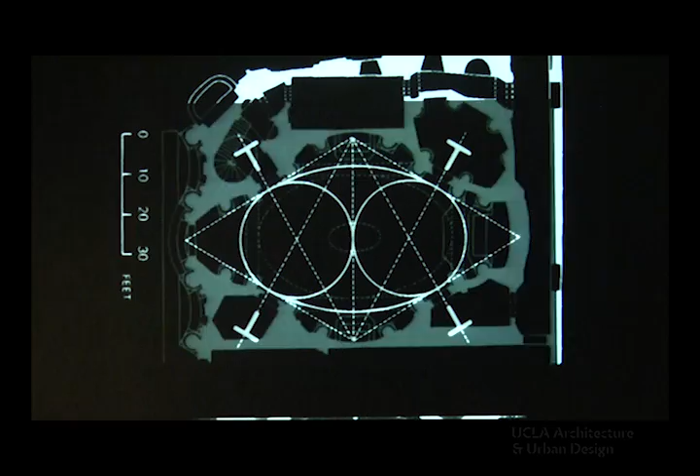The fascination for Baroque elements is also based on the rigorosity with which these architects actually tackled opulent architectural spaces by the use of geometric conditions. So, in a way, it teaches us how we can use geometry and maybe some mathematical ideas in terms of generating opulence and articulation, protrusions and extensions, in order to incorporate them into a contemporary architectural environment.

One of the very first lineages of exploration that Sandra and I did are basically considering topological ideas of architectural bodies. For us, there were actually two specific elements that we wanted to explore with these animations: on one side, openings in complex curve geometries, and on the other side, possibilities for circulation.

It is not about a specific architectural project. These are basically only prototypes and possibilities that we later on started to include in architectural projects. It is very important for us to continue these sorts of explorations that start with something that can be considered abstract, an abstract machine for a variety of ideas, and continue with them in possible architectural projects.

These, by the way, are direct results from our stay in Los Angeles. This is exactly what we were doing during our stay with the Schindler Scholarship, which gave us the possibility really to explore a specific idea in depth without having to consider any other thing to do.

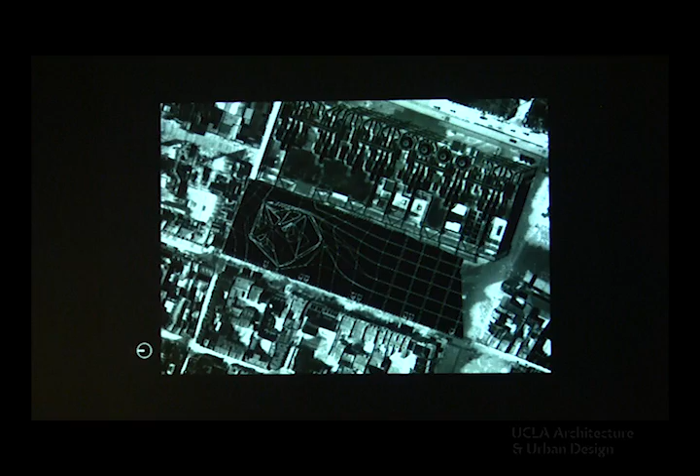So, as you can see here, this is the present condition. This is the present Atelier Brancusi, which is actually a reconstruction made by Renzo Piano. And you see how the plaza is falling down in the direction of the Centre Pompidou, which would be on this side here. There is this triangular wedge, and actually that's something that we made use of in terms of creating a three-dimensional jump between the two levels present in the plaza.

There's one specific thing about the work of Brancusi which I always was a big admirer of. There he is, the old man with the beard.

Which is the quality present in the sculptures, not only in terms of their form, but also in terms of how the materiality actually created a specific effect in space. That was something that I always was very obsessed with, and I was very happy about the competition and about the possibility to do this competition.

However, I actually was not in agreement with the competition call, which was saying that you have to reproduce again the atelier. The reason for that is that Brancusi's will actually stated that he would give or donate his sculptures to the city of Paris under the condition that his atelier is preserved.

Now the problem is that after his death, his atelier was actually demolished in the 60s, and you have to know that the original atelier was in really, really bad shape. So the idea came up to rebuild the atelier in a specific area, and this was then done by Renzo Piano.

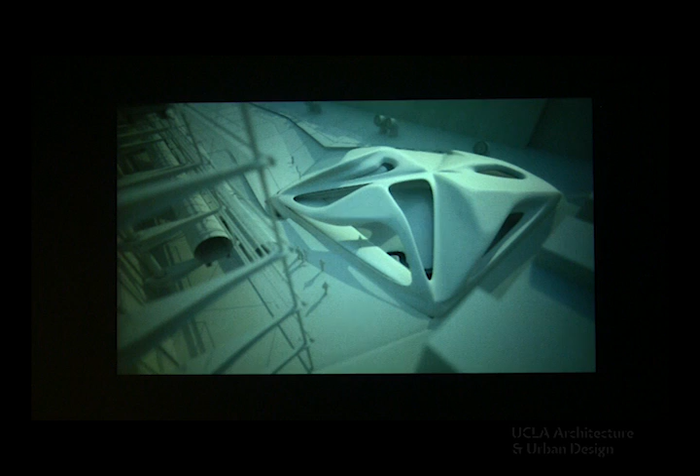A view from the Centre Pompidou.

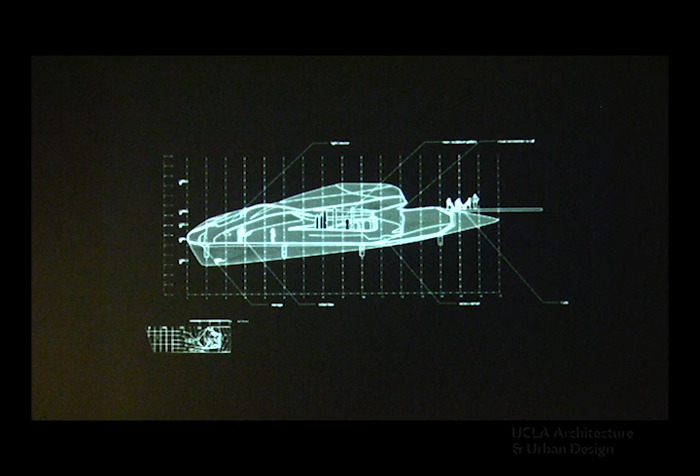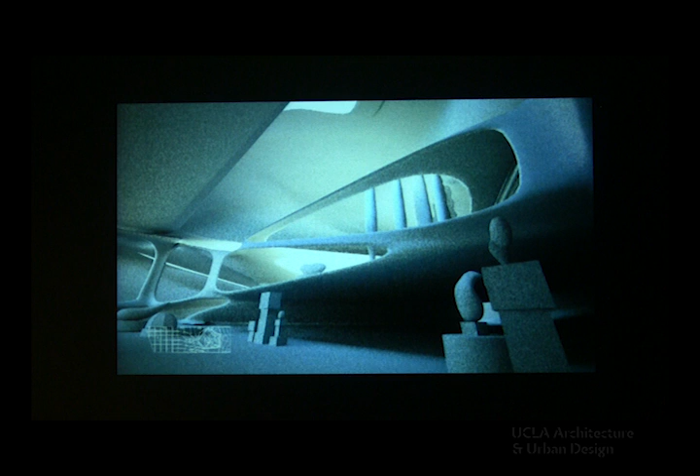Actually, we have two layers, two levels. One level that holds the sculptures, and a level below that we intentionally made rather blocked from the daylight, because Brancusi's work is not only about the sculptures. There's also a huge photography collection and a huge graphic collection. We wanted to create a possibility to show these as much as possible protected from daylight, which was this kind of area almost sunken into the plaza.

As you can see here on top, that's actually where the sculptures are standing. It would have been quite interesting to solve how we can create this free spanning area with this sort of delicate thin shells while having these heavy loads of the sculptures on top of it. But that's probably something that we would have discussed with Arup.

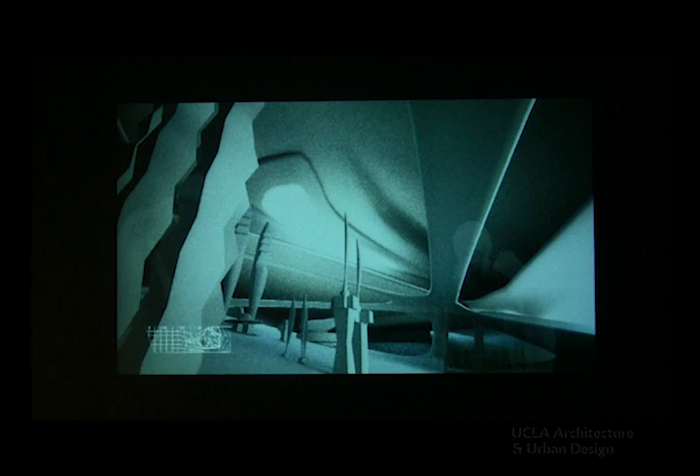And this is the top area with the sculptures. They're loosely based, the distribution of sculptures is loosely based on how Brancusi actually put them into his atelier. So it's sort of recreating the idea of the distribution of elements, but not completely copying it.

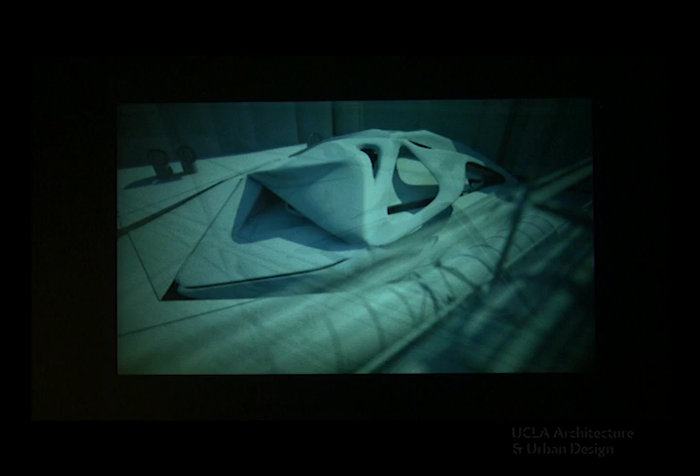One idea was actually sinking the museum into the ground instead of trying to be as high as possible, to create this kind of low slung structure, where the real experience of the form actually happens when you are walking up the Centre Pompidou. So you have the chance to really see this kind of articulation in the plaza more from the top than you have when standing on the plaza, sort of camouflaging the building a little bit in the ground.

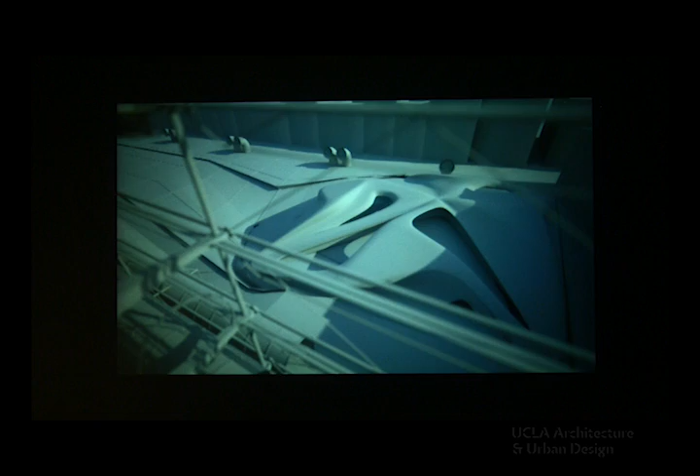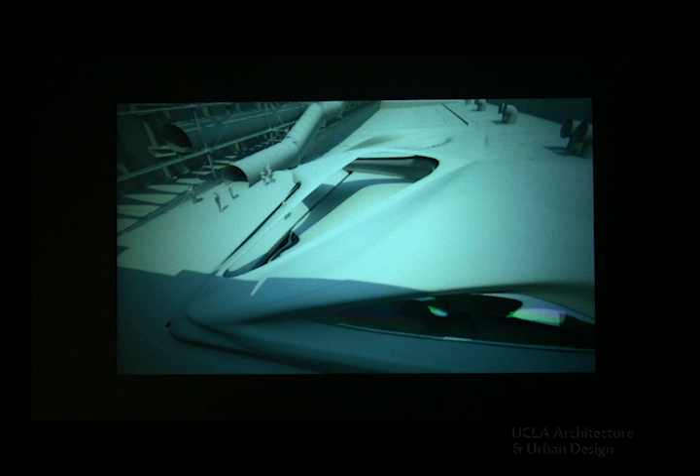This area here would have become the outside area of the cafe, and you see there's this specific node, which is a connection between the Centre Pompidou and the Atelier Brancusi.

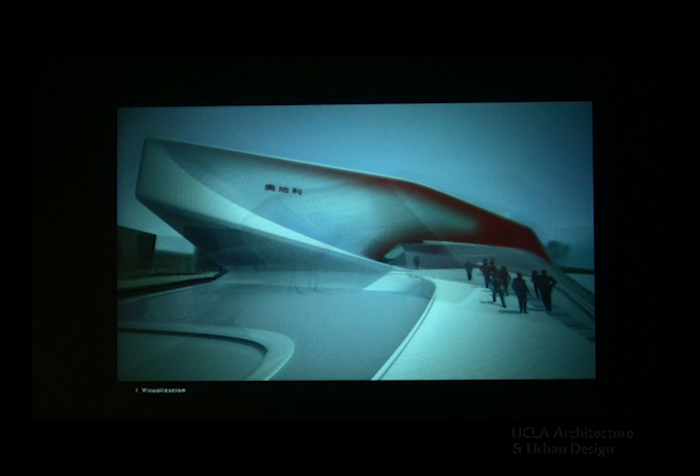Following that, I would like to show a little bit about the Austrian Pavilion. You can see that there's this kind of specific lineage between a variety of projects dealing with a similar problem. You can consider the Atelier Brancusi, for the Brancusi Museum, like the grandfather of the Austrian Pavilion, because it deals with similar problems, like the circulation, the way how you enter the building, and a variety of other similar problems, like this kind of creation of the stairs that go up into the restaurant.

Let me just walk you briefly through the project. I promise these are the only things I'm going to explain. The rest is just going to be more or less images.

There's one thing I have to explain about the competition. In the competition process, the site was about 2,000 square meters, and the program of the pavilion was also about 2,000 square meters, and you could make a couple of decisions on that. You were allowed to build to a height of 20 meters, that was the maximum, and that was basically it.

We actually decided, instead of trying to fill that volume as much as possible and do the biggest building possible, to reduce the size of the building, with the argument that we said, okay, we're going to do something small, but it's going to be, in terms of architecture, excellent, instead of making a big box. Additionally, what came along with that is the fact that we moved the building to the back of the site.

We created an entree for the entire building at the beginning, so that we actually had the chance, right from the beginning of the site, to try to control the movement of the visitor and see how they actually start to enter and penetrate the building.

So what you see here in the front side is actually a ramp that goes up to the entrance, and this is actually the highest point of the pavilion on the lower floor.

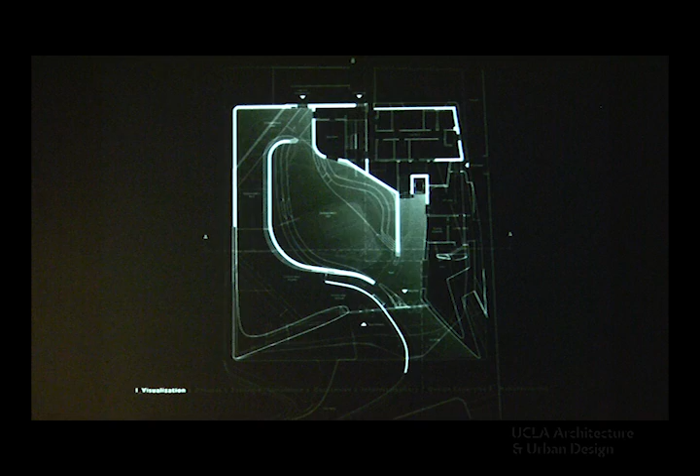Which, in fact, was called the city area, but for us it was always more the concert space. This was actually the originator of the entire building, that's what we started with. For us, it was very important to create a space that acoustically was on a high level, so that we would have the chance to do classical music, classical concerts inside that space with an appropriate quality of sound.

Then on the upper floor, you have this kind of outside staircase that goes up here, and this is the restaurant area of the entire pavilion. Bar here. A huge kitchen.

For us, we wanted to have a kitchen that is really functional. We didn't want to have a kitchen that just warms up food. We really wanted it to be in action, with fresh made food there.

VIP area and the office space, and a garden that was open to the sky. The idea behind that garden is that, if you notice, there are actually no windows on the borders of that space, except here on the back for the kitchen, but everything else doesn't have any windows. It's only this opening in the middle, and the basic desire behind that was we knew that the expo was going to be just hysterical.

There's going to be a lot going on, a lot of people. Every building is going to cry louder than the other, and we thought it might be a good idea to create a secluded space that allows you to focus on one area only, and in this case that was the sky.

It turned out to work quite well, and I have to say that with the journalists at the expo, especially this garden became very popular because you had free Wi-Fi, you could focus on writing, and you were allowed to smoke. So that's actually what really worked there, because it wasn't allowed to smoke anywhere else.

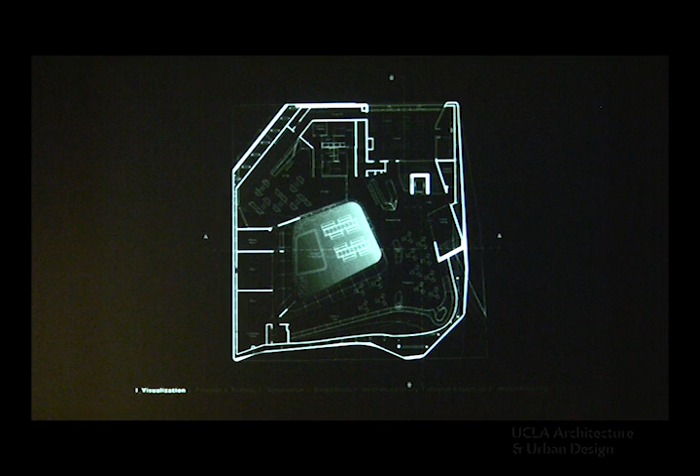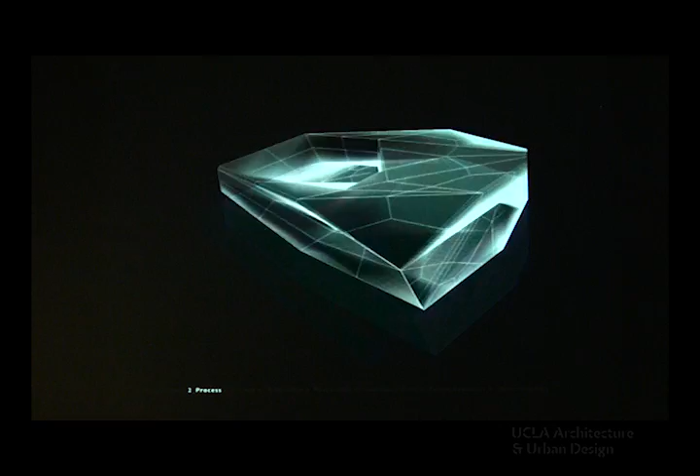Talking about the way we work, it has a lot to do with evolutionary processes. There's a huge array of varying elements repeating specific qualities. If you think about evolution, it's basically a replicator that, at the end of the day, by a filter, defines a specific result.

We had about 100 iterations that merged this kind of box, which consisted of the space that was the interior of the concert room I was talking about before. Out of that, we had a variation of topological conditions unfolding from that space and creating the rest of the program. In this case, the filter is basically the sensibility of the designer.

So we decided, not only because of the form but also for a couple of other reasons, to go with this element and continue exploring what it's actually able to do in terms of space.

On one side we have this kind of evolutionary process. On the other side, we have the problem of how to create, let's say, the construction of the building.

This is actually a definition I'm really proud of because it's so minimal—probably the smallest Grasshopper definition ever. It was there to define the gradient of coloration on the facade and to see how we're going to distribute the tiles on the facade, to create this very specific facade condition on the outside.

I was already talking before about simulation, and I was saying that intensive forces can start to shape the form of a building or a space. What you see here is simulations we ran to understand if this central space would give us the qualities we wanted in terms of acoustics.

It's of course a back-and-forth process—adapting the form, analyzing, adapting the form, analyzing. The more interesting part comes when you're able to directly input data from the analysis into the design process, which has become possible since about a year ago, where you can really influence the form through a parametric process.

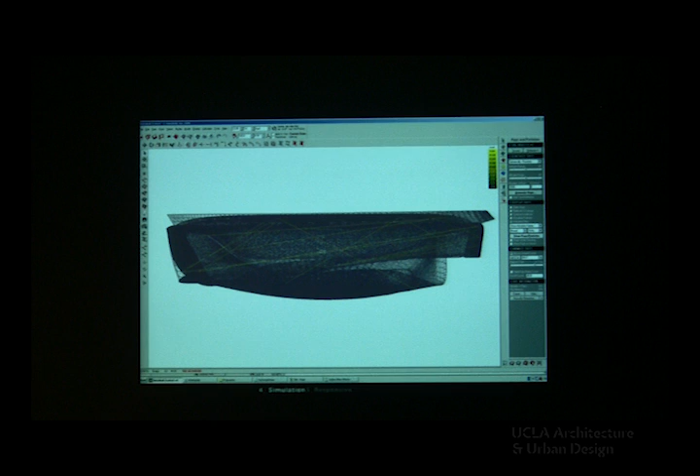But these animations are a little older, so that possibility came up after we had already finished the project. However, the idea as such is, I think, completely possible and explainable.

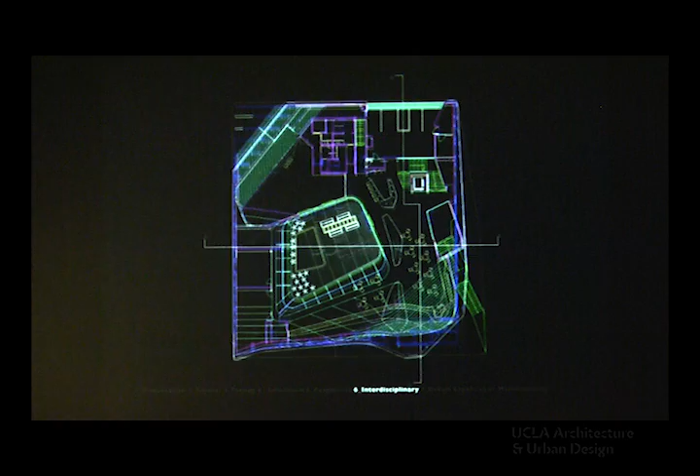From the very beginning, we included different disciplines to work on one model. We had one master model that all the different companies were working with, which turned out to be quite successful. Working with Chinese companies, it can easily happen that they come up and say, 'We have to lower the ceiling one meter because we have to put some pipes in there,' and you say, 'No, it's impossible—we cannot change that because otherwise we don't have enough space.'

We introduced these companies to some building information modeling software, making them understand that they can simultaneously see where the problems are and how to tackle them, instead of trying to put multiple layers of function on top of each other. It can be one layer that includes everything that is needed.

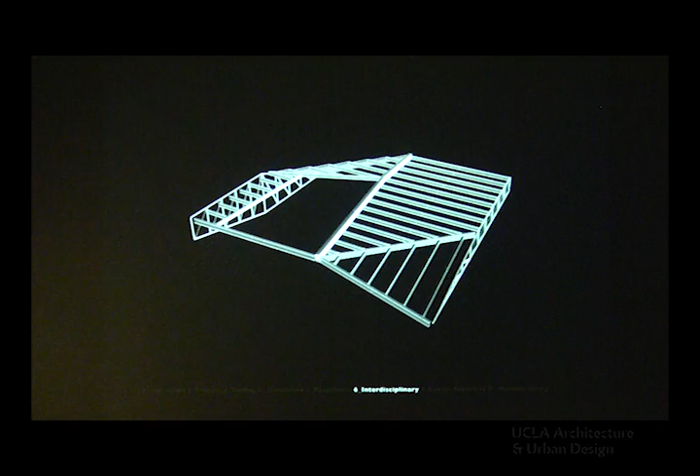As I said, the building is small, and the height of the ceilings is really, really low. One of the engineers involved in this project said that it has less to do with architecture than with aviation, in the sense that you have to put a lot of functionality in the layers between the floor and ceiling.

We also have a variety of different collaborations in terms of interdisciplinarity. One thing that started here in LA, and that we're still continuing, is the possibility to work together with biofabrication labs. There's one at Drexel University we've been working with for some time—interesting to me in the extent that they have something like a 3D printer for organic matter.

Their idea, at the end of the day, is to produce organs. You know these examples. But they're already quite far, having succeeded in making cartilage and veins and things like that. We're trying to understand how we can use this idea to create variations of material.

Our collaboration is in the sense that they have to create—they figured out that all these kinds of constructions have to be based on specific models that are, let's say, organically shaped, and they have to find methods on how to do that. The exchange is that we try to inform them about the possibilities they have to reproduce these sorts of forms, and in turn we try to gain knowledge about how they can actually do this kind of 3D bioprinting.

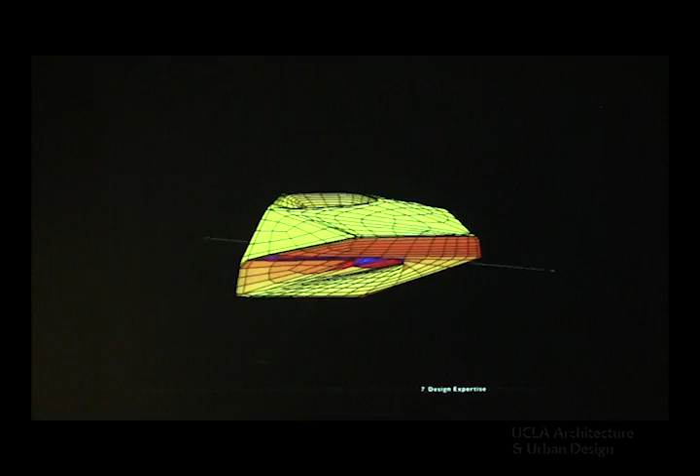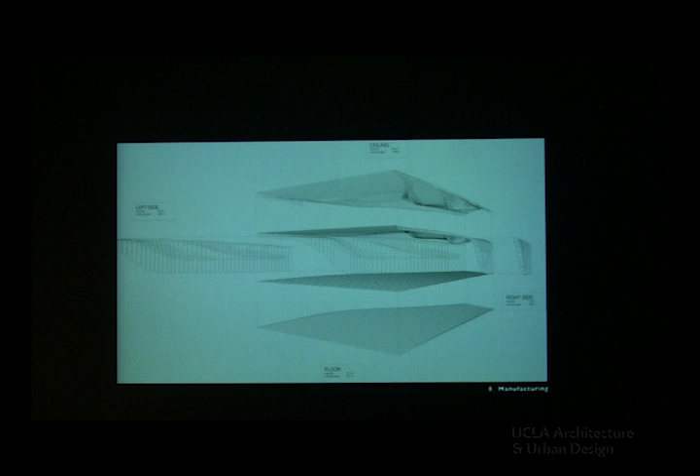Again, simulations. At the Austrian Pavilion, we tried to do a couple of things that helped us understand how the building behaves and how it can be responsive to specific conditions. It's not so much about optimizing things. You saw the evolutionary process that led us to a specific form, but this form is driven by a combination between desires, ideas, specific sensibility, and of course some performative parts. As in nature, nature does not optimize, it just changes. Within this process of change, something may pop up that can be functional, interesting, or sometimes just plainly beautiful. I think these combinations create a possibility to select opportunities for a project.

Fabrication is always an important part for us. It has become almost ubiquitous to use parametric modeling or parametric techniques to subdivide elements in order to fabricate them. It's very practical, I have to admit. I like the fact that a specific form can be divided into numbers and elements that at the end of the day comprise a bigger whole.

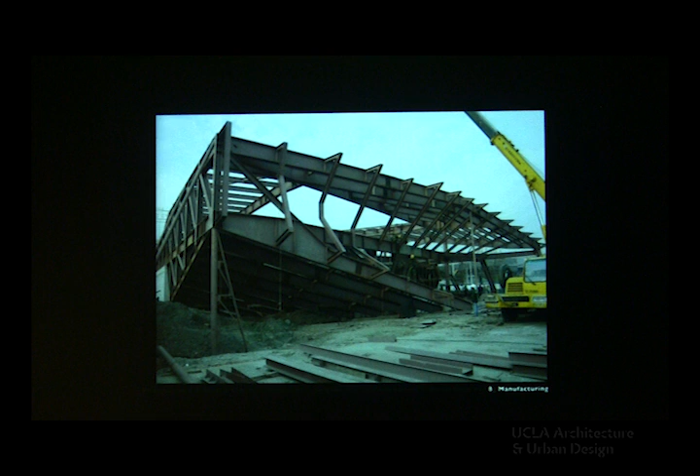Let's go back to another idea of fabrication of design. This was about the fabrication parts of the Austrian Pavilion. We tried to include as much computer-controlled fabrication in the design as possible. The steel construction you saw was laser cut. All the areas of this model that were really strongly curved were CNC milled. This also extended to the furniture, which followed the same idea as the entire building.

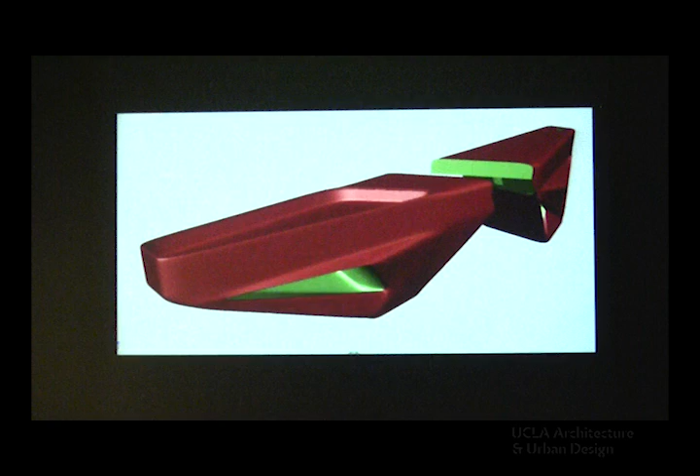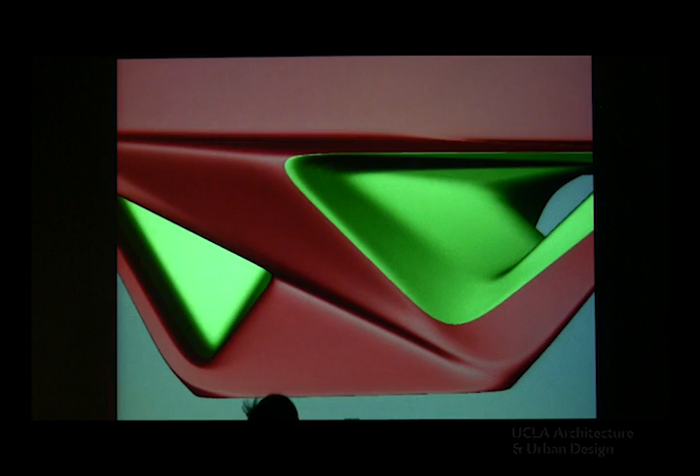Here we have an example: the shop desk for the pavilion. It follows the same idea of the topological bodies, so it's related in a way to the entire design process.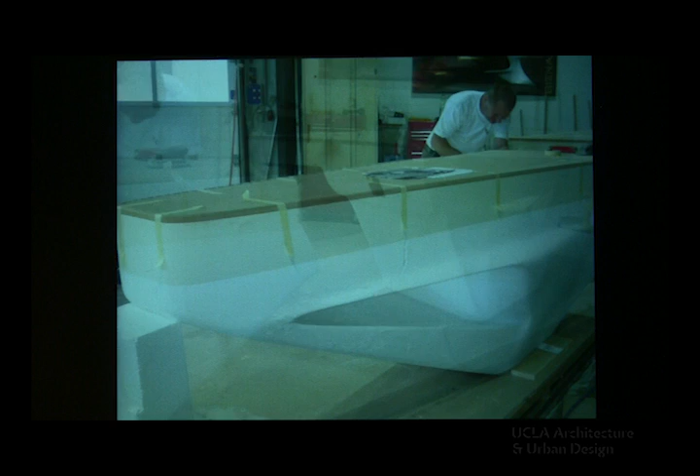There's a great company in Austria called EDM Design that not only has the machinery to do these sorts of things, but also the sensibility to get it right, in the right quality, right surface conditions, and so on. This is an interesting moment where we started to collaborate with these guys.

The facade is made of porcelain. There's a specific reason for that—it's this visual idea. You have to know that Vienna is not the oldest producer of porcelain in Europe, but the second oldest. So there was this idea, kind of obvious, that if we have this connection to such a Chinese material, let's try to use that. It turned out to be an interesting selection.

As you can see, in the entire pavilion there are no big gaps, no big joints anywhere. It's basically comprised of millions of joints. I remember working on the model and we already started to see how we were going to subdivide it, like with the Atelier Brancusi, how we'd divide it into specific panels and so on.

We started working with this idea of using small tiling for this. One of the engineers told us, well, you don't need big joints because you have millions of joints, and they expand and contract simultaneously. So you don't have the problem of creating big separations between elements that expand and contract. It has this very soft and weak condition of expanding and contracting, and it's easy to clean—that also works quite well.

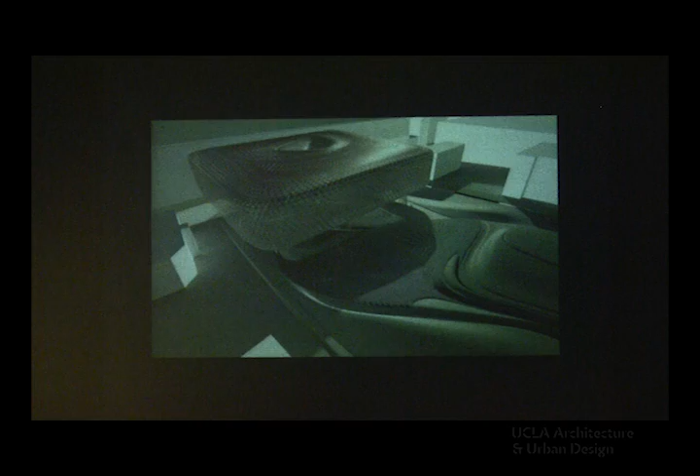In the same lineage of the topological bodies, there's actually a couple of projects that I'm just gonna go briefly and fast through. This is our contribution for the competition of the Dam Maribor, Museum of Modern Art in Maribor, Slovenia.

This was for the Hong Kong-Shenzhen border competition. You see, they're basically all talking the same language and still moving in the same lineage of topological bodies.

And this is a high-rise project we're currently working on in China that not only tackles this idea of a continuous body, but also tackles the problem of a rustic facade, something that looks very rough from the distance.

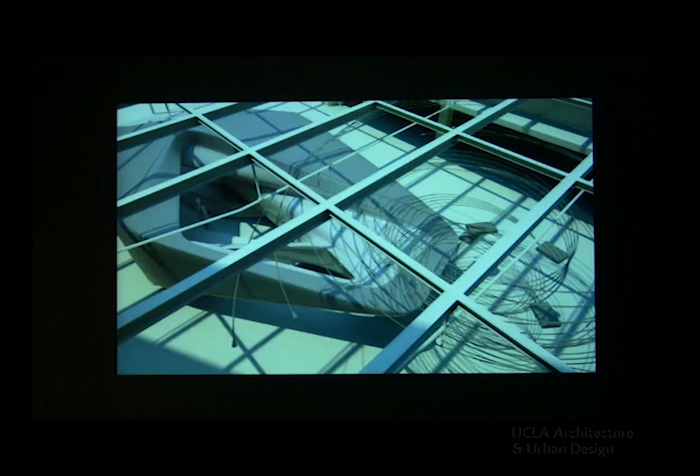And the last one in this line is a project that we made for Microsoft in Austria. They have this headquarters in Vienna, which has this kind of huge, large lobby, and probably like any software company, they have this huge collection of media art.

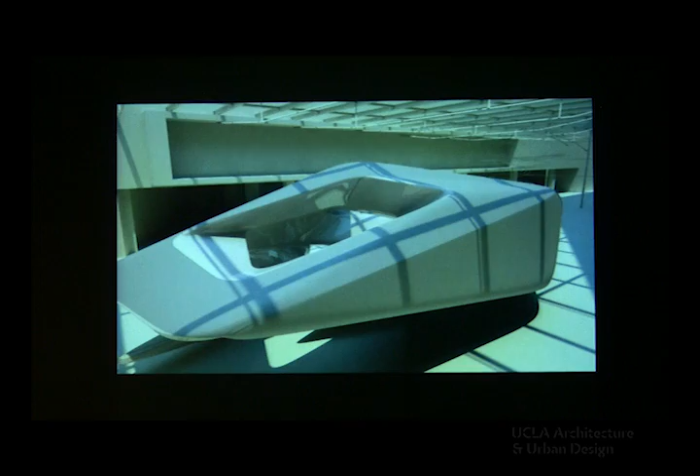And they wanted a place where they could display this art, and simultaneously it should serve as a small meeting area where a couple of people could sit down and discuss maybe a specific project.

What you see here in this kind of frame, there is this curving element. This is another piece of art. It's called The Displacer by a guy called Friedrich Wienermann, one of the younger generation of media artists in Austria. He would hate it if I said he's a media artist, but that's the way it is.

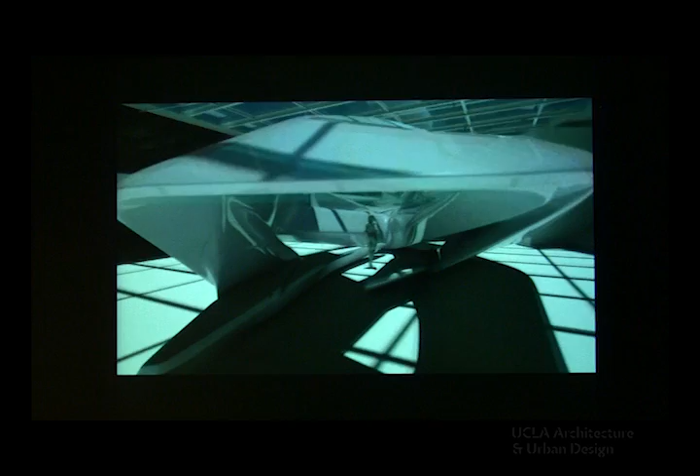And this is the sort of pavilion that we created for them. After seeing the first iteration of this project, they asked us to change it so that they could disassemble it and get it to conferences and road shows and things like that. So it should become more of a mobile pavilion.

And at the moment, we are actually working on how we can take it apart and put it back together quite fast, which is a bit hard to get because it's quite heavy. So you have to work on the technical part to make it more lightweight, but also to make it more accessible in terms of shipping it around.

Now, in a completely different direction, we had this entire lineage of topological bodies. Another series of elements or ideas that we have been working on is about components.

And we were actually trying to understand if we can find an alternative method to just taking components and repeating them along a surface. So if we can find something that is not as rigid and not as rigorous, but more loose, more vague in terms of how it behaves, that will become interesting in exploring one or the other condition in space.

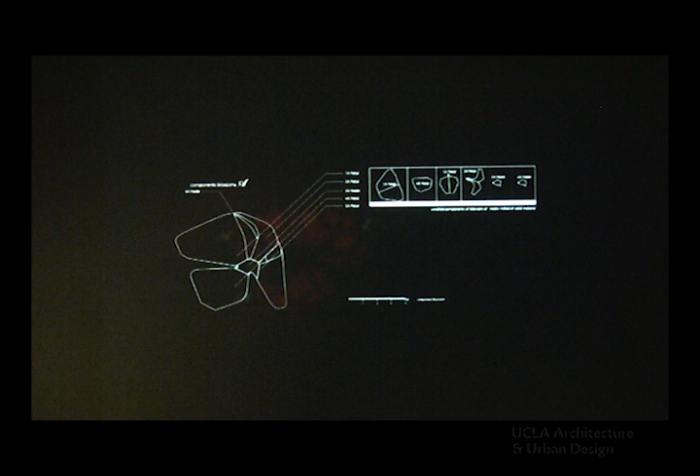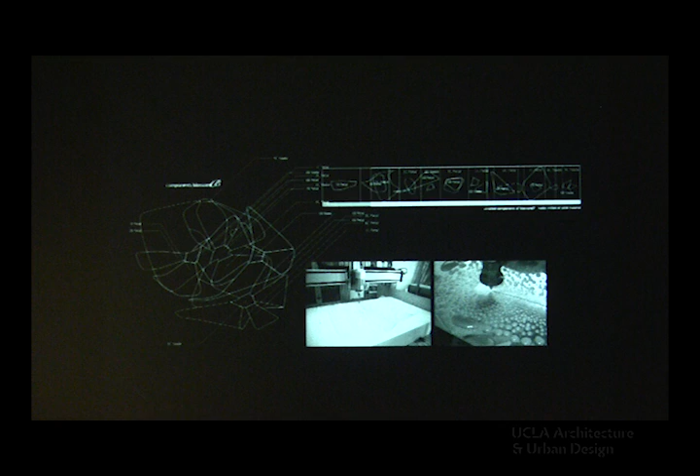We came up with a multi-layered condition element that gave us the possibility to make an enclosed element, something that can be freestanding as a pavilion, or that can also be in a shopping mall. Our idea was to create a complex node—this was still the one in the middle—and flat cut sheets connected at the node. Because these flat sheets have a specific flexibility, they allow us to create variation in the connection of elements, so you could create a variety of different shops that are all related.

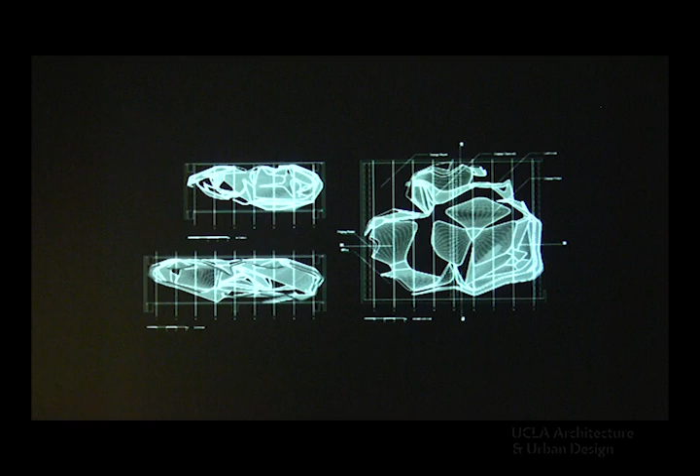You can recognize them as one specific line, but they can be responsive to the space available. This would be one example, where you have this shop that would just be an empty shop on a street, and the varying layers give you the possibility to create different effects. So that would be the shop, also using specific elements like filaments to give them a programmatic point—instead of just creating lines where you hang the clothing, we tried to include every quality present in the sensibility to really make it work also as a boutique and shop.

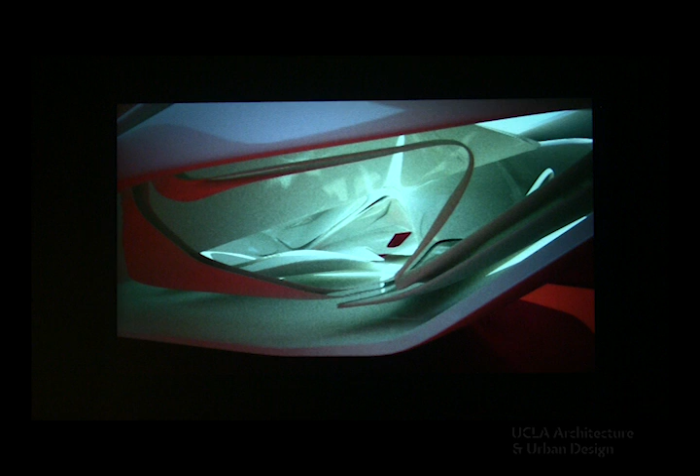When we did this project, I think it was probably one of the first times we were using software able to recreate this kind of color bleeding effect, which I think is quite an interesting field of exploration—how varying colorations can create different hues within a space. Unfortunately, we didn't win that one, but that's the way it is.

Tessellations—there's a variety of tessellations in space, also following this idea of components, but in this case more rigorous than the first ones, which were more free and loose. These kinds of components in space can also be, in this case, spheres that create this sort of complex space.

In this line of thinking, the first thing we did when it came to design a result was this exhibition design for the Austrian winery boom. Just to give you an idea of why this exhibition about Austrian wineries exists: about 25 years ago there was a huge wine scandal in Austria because vintners started mixing wine with antifreeze. The reason is that the glycol in the antifreeze makes the wine sweeter—so they tried to sweeten the wine with antifreeze, which was of course completely illegal.

I'm not really sure if it's really healthy, but nonetheless, the result was that the Austrian wine industry was completely ruined because no one was buying Austrian wine anymore. So what happened is that all these old vintners gave up and said, I don't want to do this anymore, and gave the wineries to their sons and daughters. These guys were all educated in France, Italy and Spain to make wine, so they actually knew how to make qualitative wine.

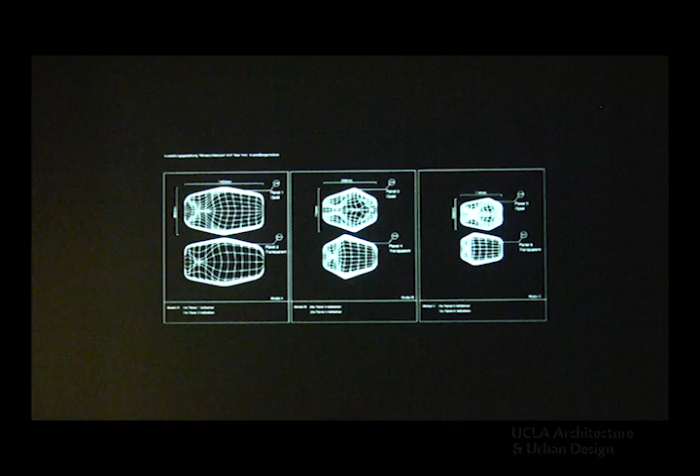What we came up with was a vitrine made out of two components that are stackable. It's actually a family of three different elements, three different pots, with a population of about 56 of those pots, distributed between some on the walls and some on the floor.

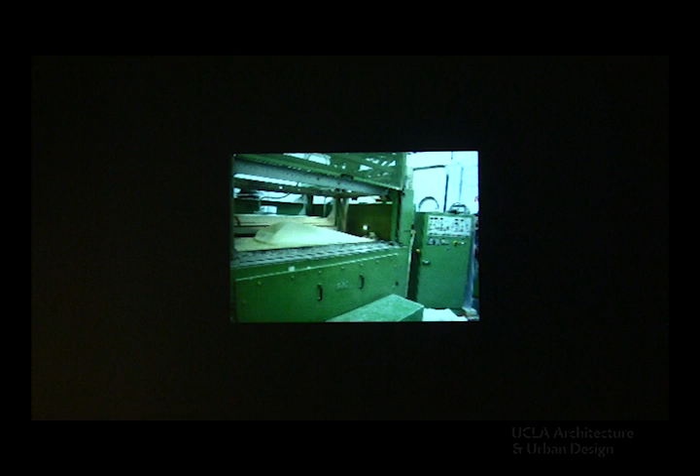The first time we showed this project was actually at the Austrian Cultural Forum in New York. From there it was considered for a US tour, so it was on show in New York, then moved to LA, where it was at the MODAA Gallery, as far as I remember, and then moved on to Napa.

We also learned in the process that it's probably best, when you have a traveling exhibition, to take along your own light, because you never know what you're going to find where you have the show. If you want to rely on a specific atmosphere, you have to make it yourself. The plasticity of the material allowed us to do this kind of variation of luminous effects, which worked quite well with the bottles being backlit, and with the graphic glowing on top of the pot.

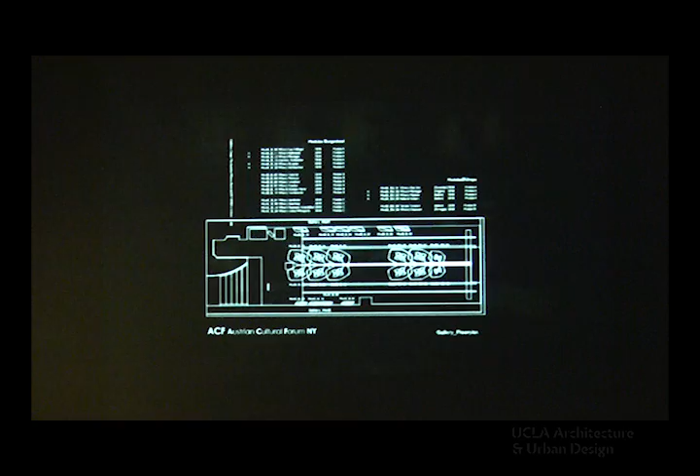So this is actually how it looked like in New York. It was kind of a more linear distribution of elements.

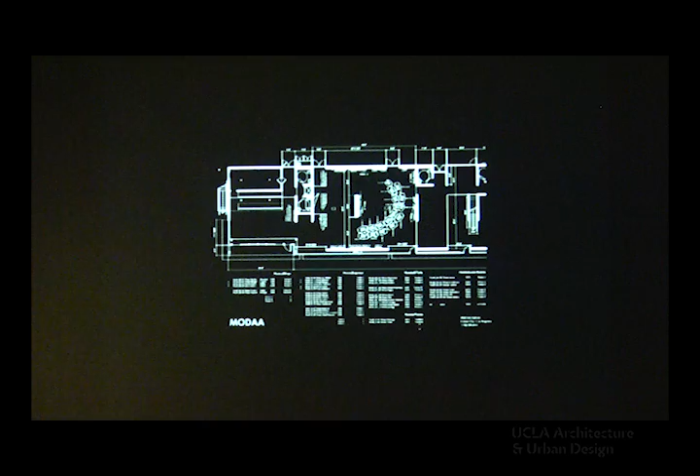This is loosely based on something like a tessellation. You can see that the elements are somehow overlapping, allowing you to tessellate specific areas. It's vaguely based on hexagons, but they're sort of distorted, so there's a certain moment of uncertainty in the entire design, which at the same time makes it interesting for me.

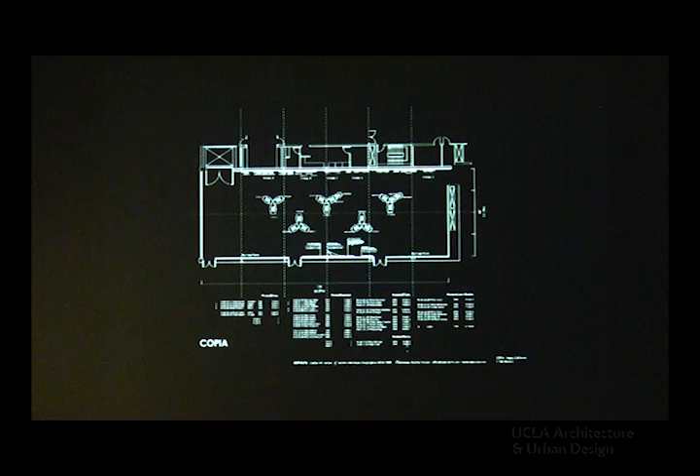And this is actually how it looked like in Napa Valley. This was probably a highlight for these vintners from Austria, that they actually showed their wineries in Napa Valley. I think that was the highlight of the tour.

And of course, there was a variation in terms of tessellations. This one here was more rigorous, in that it was the first time we tried to vacuum form things. I remember when we were here in LA, you know where to go if you want to vacuum form something. When we were in Vienna, we were like, where the hell are we going to vacuum form something? There's no film industry, nothing with that sort of machinery.

We figured Vienna doesn't have a film industry, but we have theaters and operas, and they also have workshops. That's actually where we found the possibility to do these sort of things.

This element was also more rigorous in a way, because the first time around we used steel legs that didn't really fit completely into the language of the design. The second time, we were able to vacuum form the legs too, getting the entire design to work in a more continuous fashion. It also created the possibility to have empty layers in between, delaminated elements that allowed us to include light and other things without being visible even from below. These are all the pieces of the exhibition coming together.

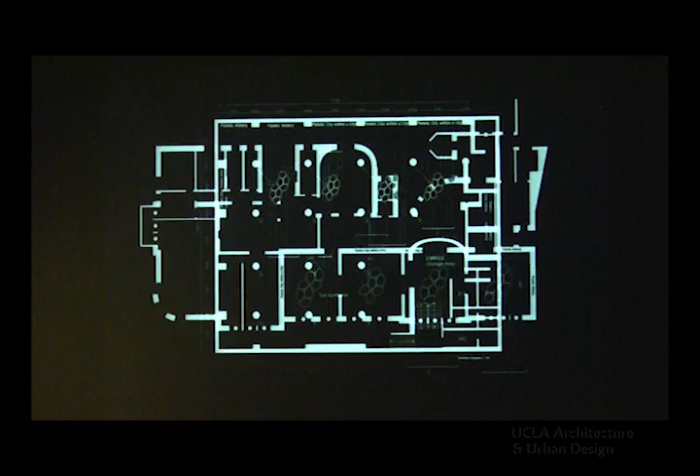Again, it had to have the possibility to change in shape and distribution without compromising the exhibition as such, so you always had the feeling that the exhibition was exactly done for that space.

It's still on tour at the moment as we speak. It was first shown in Venice, Milan, Munich, and some of the images here are from the Galleria Eigen+Art in Berlin. It has been traveling around a lot, which proved that this concept of the pot and this kind of composition that works fast actually worked pretty well in terms of setting up the exhibition very quickly.

As we speak, the exhibition is getting prepared for shipping to China, so it's going to be in the Hong Kong Shenzhen Biennale in December.

Let's continue with this lineage of components and tessellations. This is a sort of chess game we designed for Swarovski. It's not traditional chess, as you can see—it's based on hexagons. We didn't invent this; it's an invention of a German mathematician named Kirk, who came up with a chess game based on hexagons that also works with a minimized size of figures.

Again, talking about a specific evolution, a specific family of objects that are all related to each other, it's very clearly visible that there's one generator, and the rest is extruded from that one piece that created the first iteration.

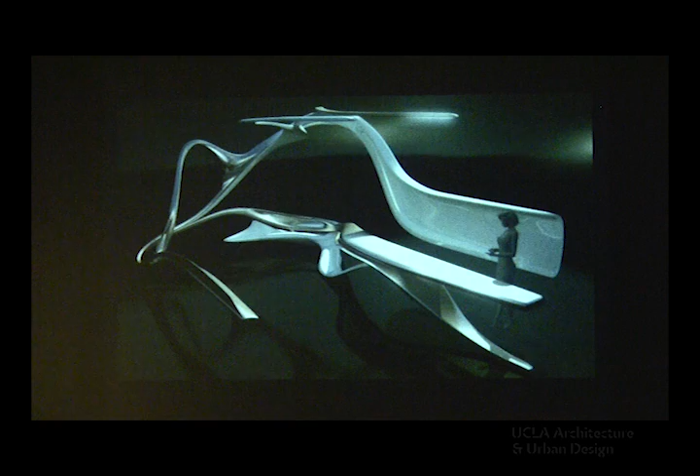When you talk about sensibilities, intensive forces, solar radiation and wind forces shaping architecture, it can happen fast that somebody comes and says, 'I have a shop selling solar panels, can you do a design for me?' Of course, why not. So this is a design for a shop in Carinthia, Austria, for a company that produces and sells solar panels.

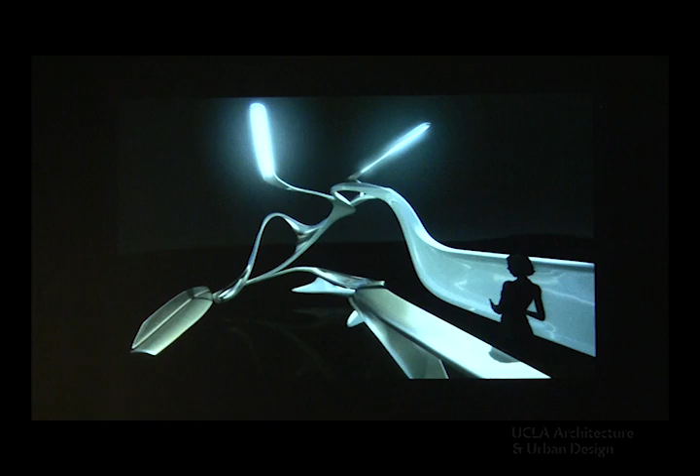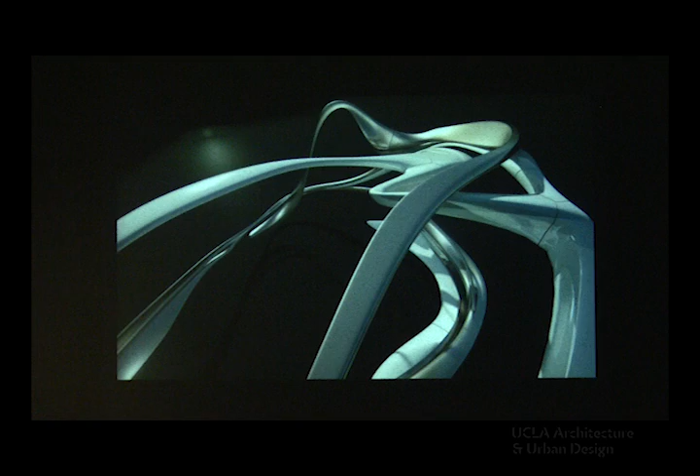There's more I could tell about that, but specifically what I was interested in is we had this kind of white element in the back. Let me see where it is... no, it's not in the pictures.

I think that was already visible before. I mean, this is not our robot or anything. It would be cool to have one, but that's probably not possible.

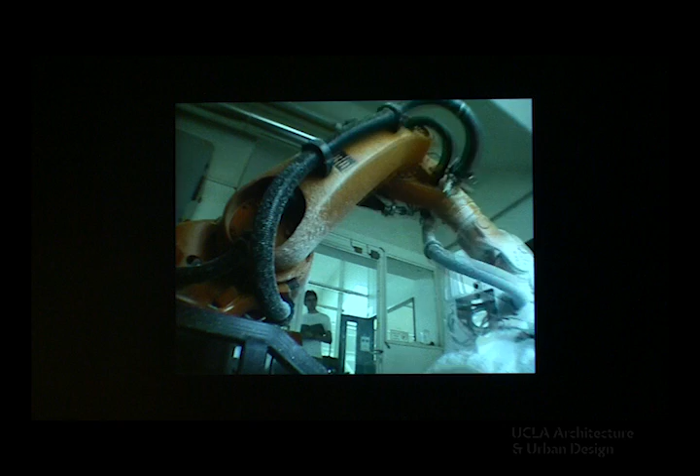But there is actually one robot in Vienna, at the Angewandte University, where we have the possibility to access it and produce prototypes and some ideas.

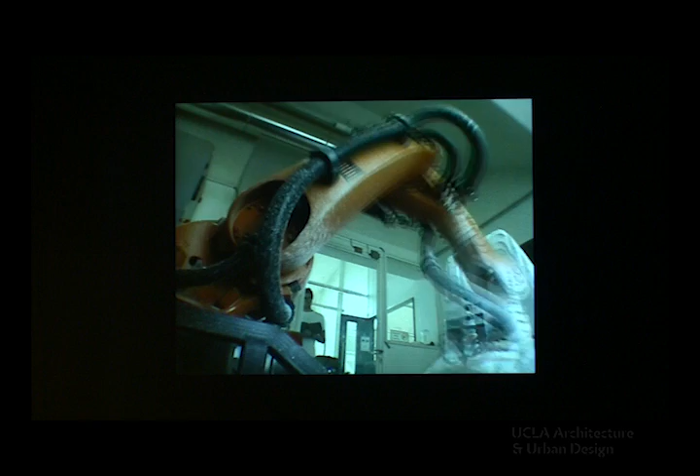Honestly, I'm not so sure the 7-axis robot is such a great tool for the academic environment, because it's so much more complicated to use than a 3-axis milling machine, that you need to put way more effort into creating the files for the machine.

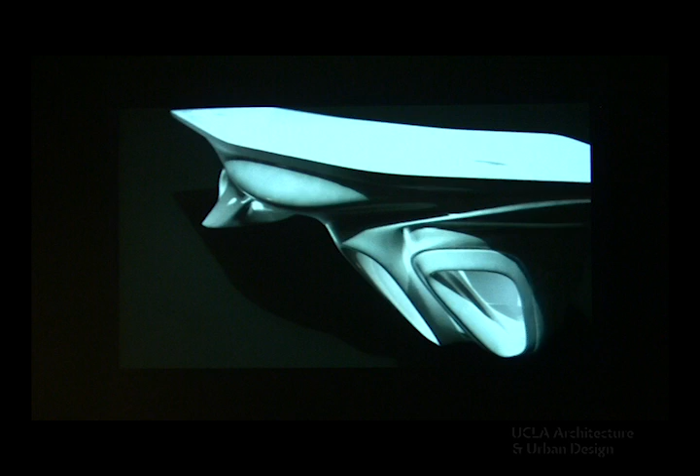We've also been involved in some small amount of product design, really small amount. For example, the guy who was producing all the furniture for the Austrian Pavilion asked us to design a desk for him. And there it is, the finished piece. I think it can even be ordered in his office, in his company.

What's interesting for us is to go again for these sort of details, like I was saying before, including the quality of detail in the surface condition. So this kind of orifice that's happening here is just sort of eating all the cables. It's funny how this very conventional computer stuff looks a little old-fashioned on such a table, but you have to find a way to make it fit.

Something we made for the MAK shop in Vienna, a sushi board. You just put the sushi on top, and it's standing on this ornamented surface. American black walnut wood, I think, something like that. Turned out actually nice out of the milling process.

And talking about the MAK show, a couple of words about it. We're always looking for new possibilities to find something that somehow engages us in a specific discussion. In terms of geometry and mathematics, we're always looking for something that inspires us and gives us ideas about what we can do with our own work.